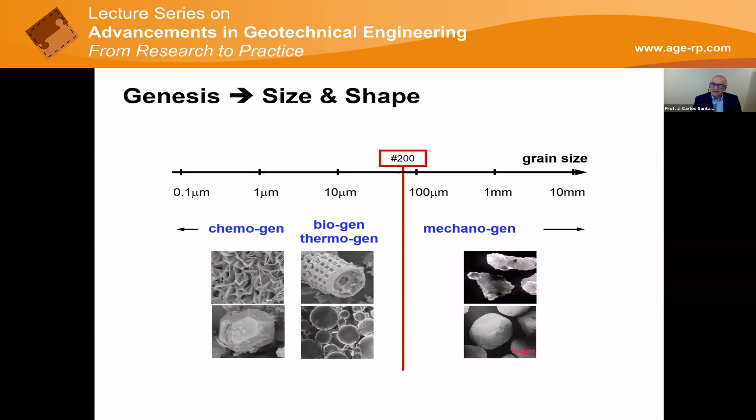So now we see that across the size range, we see different formation mechanisms, but also the forces acting on each individual particle change. At the large size, the self-weight of the particle is important. At the small size, electrostatic forces - that's the reason why dust gets on our furniture - and capillary forces play a more pronounced effect. Throughout the whole size range, effective stress governs. The only difference is whether these other forces come into play in addition to it or not.

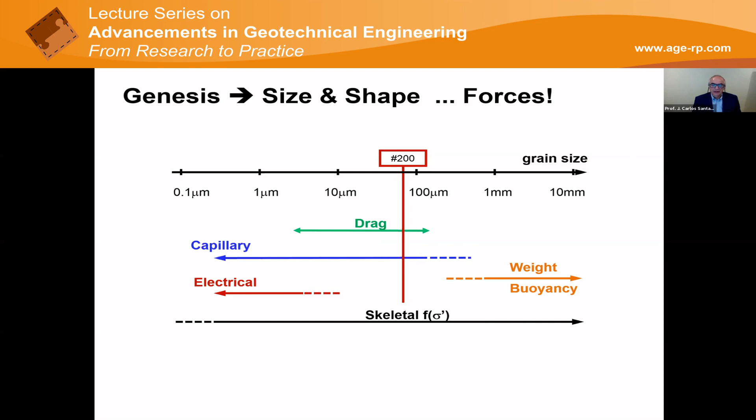And the last slide in this sequence, I want to remark what I said earlier. On the coarse size, the question is, are the particles rounded or angular, and do we have enough finer particles to fill in the voids, to increase the interconnectivity between particles and the stability of these skeletal units? On the finer side, it's the electrostatic interactions we were talking about - the van der Waals forces, the double layer repulsion, and the importance of the dipolar nature of the water molecule. Otherwise, none of these effects would happen.

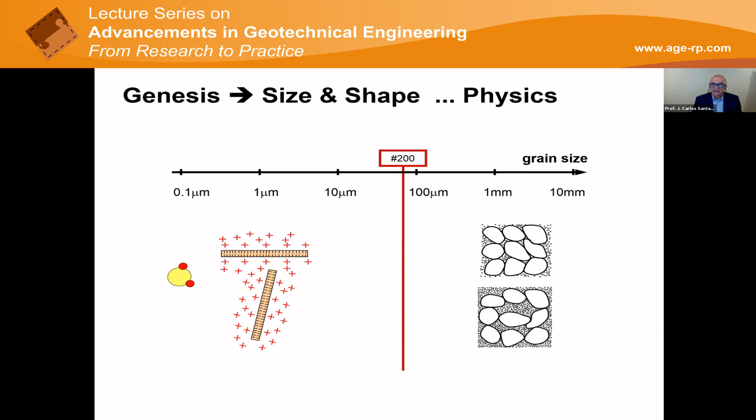In the old times, we used to mix bentonite with carbon tetrachloride, an experiment that comes from the 1920s, to demonstrate that we lose complete plasticity when we do not use a polar molecule. We don't use carbon tetrachloride anymore because it is a carcinogen, but look for kerosene, or look for a molecule that has low polarity, and convince yourselves of the importance of water in the behavior of clays.

So then that brings us to the revised soil classification system. We are very excited about this method because it's working very well. The basic unified soil classification system really got it so well in so many dimensions, but some of the choices made were not precise. And now we have 100 years of data, so we can do much better.

It's about occupancy of the pore space by the fines, and whether it is coarse controlled or gradually becomes fines controlled. On the left-hand side is all about the effect of pore fluids, and so we make liquid limits with water, water and salt, and kerosene, and we have a wonderful clustering opportunity to identify soil behavior.

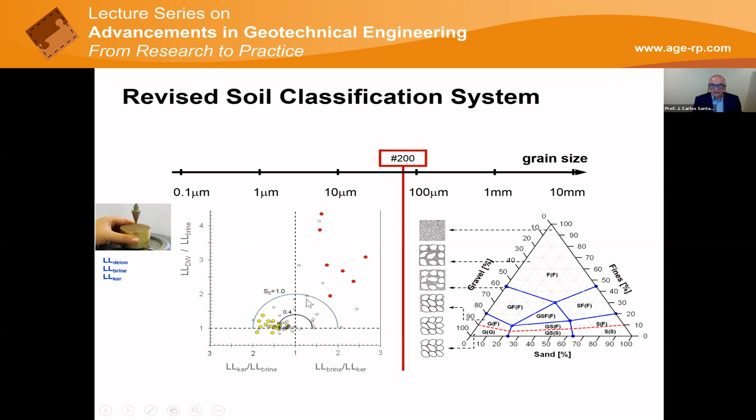So in summary folks, I think it is so important to remember what Terzaghi told us in the 1920s: soils are made of grains. Soils are granular materials, and everything else follows - the importance of size, of shape, of the pore fluids, of effective stress, compaction, stiffness, dilation, strength - it's all effective stress dependent. And then when we go into fines, it's all about how much surface they have, how small they are, specific surface, and the sensitivity to electrochemical and capillary forces.

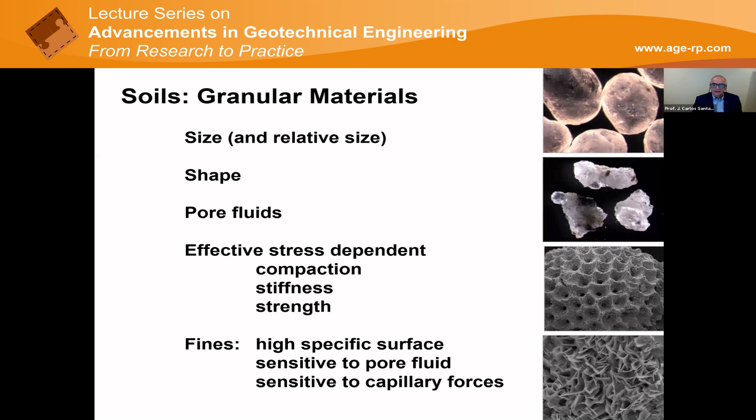So with that introduction in mind, now we know what we are testing. And the next question is, what can mechanical waves tell us? You can hear Pavarotti singing, and there is so much information that comes to our ears by sound waves. So what is the origin of sound waves, and what can they tell us about soils?

Well, everything is about Newton: F equals ma. This is mass density, rho. This is acceleration, the double derivative of particle displacement with respect to time twice. This is ma, and this is the force across an element. And so from here you see that there are two modes of propagation: one is varying longitudinally in X, and the other is varying transverse with particle motion in Y, but propagating in X.

I couldn't get the picture to be precise, but you see these are pendulums hanging from a wall. If you displace a particle transverse to the position of the pendulum, and the pendulums are interconnected by little springs, then this perturbation will propagate to the right while the particle continues vibrating in the Y direction. A longitudinal wave is when I have the same sequence of pendulums, but now I displace one in the same direction as the alignment, and they are connected with little springs, which is the contact stiffness between particles. This perturbation propagates to the right, but the particle motion is in the same direction as the perturbation - this is called a longitudinal wave.

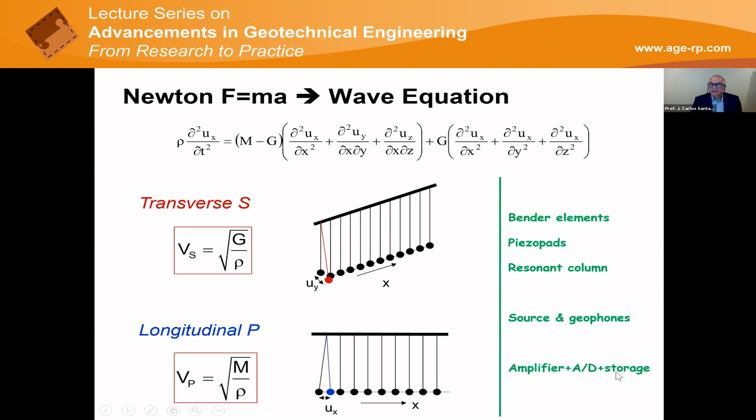You need some type of a source. A piezo crystal can do it, but in the field we use other bigger sources and geophones. In all cases you need an amplifier, an A to D converter, let's say an oscilloscope, and some storage capabilities. Very simple setup, very powerful measurement.

I will not mention anything about attenuation because we don't have much time, but I will talk about S waves and P waves. And because S waves propagate by shearing through the skeleton, not by compression—otherwise water plays a critical role—we're going to say quite a lot about S waves. So here we go.

Let's assume I have a column of slurry, and at the bottom of the slurry I put two bender elements, in the vertical direction, so they are not affected by the self-weight. We see how, as the column goes from being a slurry to being a sediment, the shear wave velocity becomes transmitted across the granular skeleton. At the beginning there is no transmission—it's a fluid—and gradually the skeleton begins forming and the shear wave becomes stronger and travels in a shorter time.

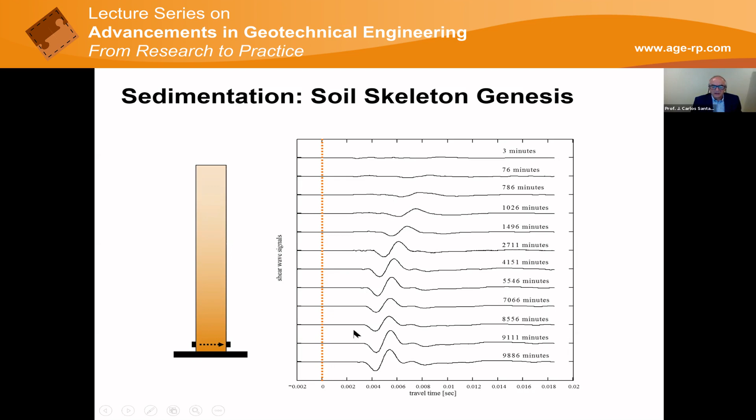Some of these travel times are very long, folks. These wave propagations are less than 1 meter per second—we ride a bicycle at that speed. So these are really very slow wave propagations at the beginning of the formation. And we see that in multiple experiments.

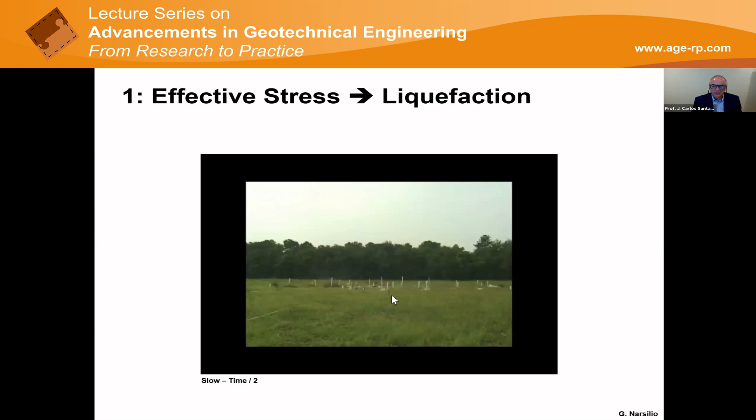Let's say this is blast densification. I'm not quite sure you can see the movie, but we blasted the soft layer at the bottom, and then the high pressure gets jetted out to enhance the ability of the soil to hold seismic action. By the way, this soil eventually settled like a foot. Major densification took place, but for many minutes, probably more than 60 minutes, the soil remained liquefied.

So let's see what shear wave can tell us. Let's take this liquefaction tank. We put two bender elements. Before we whack it, we have wave propagation, transmission. The signal is quite noisy because we are not allowed to stack—these are short-time processes. Now we whack it and we lose the signal. The soil liquefied. Then as the pore pressure dissipates, the soil begins reforming and the signal appears again.

In liquefaction, every time we liquefy a soil, we rebuild the soil from zero. That's the reason we can liquefy the same medium so many times, because it only densifies the very bottom of the column—the rest gets resedimented. This is powerful.

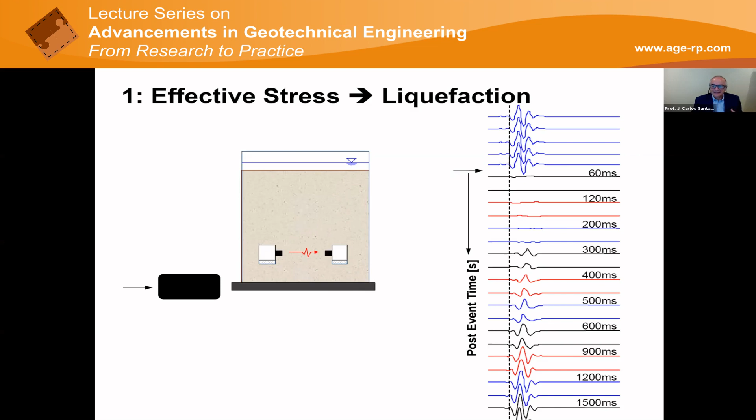Now we can do other things. For example, we can put geophones in our roads, and we can see what happens as a truck approaches the location we're measuring. We see how the granular base gets stiffer and stiffer because the wave propagation gets shorter, the travel time gets shorter and shorter, then the truck passes by, and the wave propagation decreases. It's all about the stiffness of these contacts.

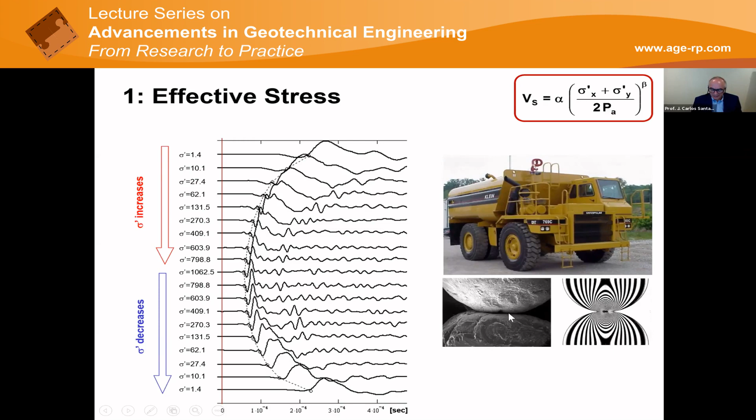This is data collected for more than 20 years from the literature and some of our own results. We have this Hertz-type power relationship that relates the state of stress—effective stress—to the shear wave velocity. We have a factor alpha and exponent beta, and depending on the soil—whether it is cemented, so beta goes to 0, low sensitivity to stress—or if you have Mexico City clays, we have completely different sensitivities to state of stress. These parameters are correlated and help us tremendously in understanding the properties in the subsurface.

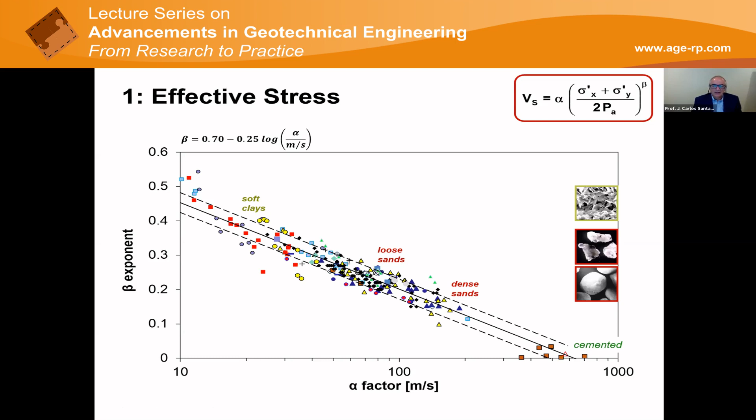But there are other forces that play between contacts. We already discussed the importance of suction. If you take a Bishop-type formulation, we can add it to the effective stress produced by the boundaries—add the Bishop suction—and we can more or less approach what shear wave velocity does during drying. This is not the soil water characteristic curve; this is the change in shear wave velocity as the soil becomes desaturated and capillary forces increase.

At the beginning we have large voids, but then as suction increases, it gets to the menisci, where clay has accumulated—this was a clay sand mixture. Clay has accumulated, builds up high suction, and the stiffness of our soil increases dramatically. Suction can play a very large role.

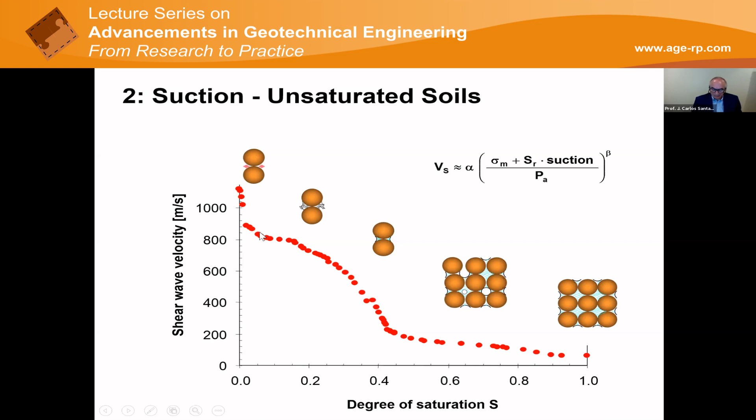But the most important part of measuring shear wave velocities is probably in the context of diagenesis and light cementation. Look, this is fly ash. We make a paste with fly ash, put two bender elements, and see with time how the shear wave velocity increases. We plot shear wave velocity versus time, and we started with 100 meters per second—this was just a paste. And you see the wave velocity passed the 400 mark.

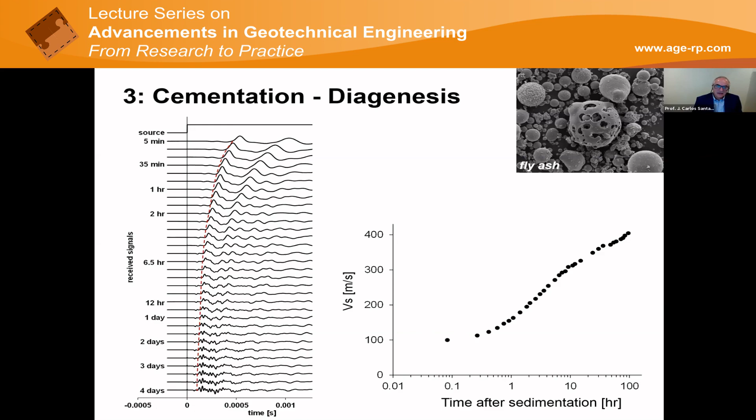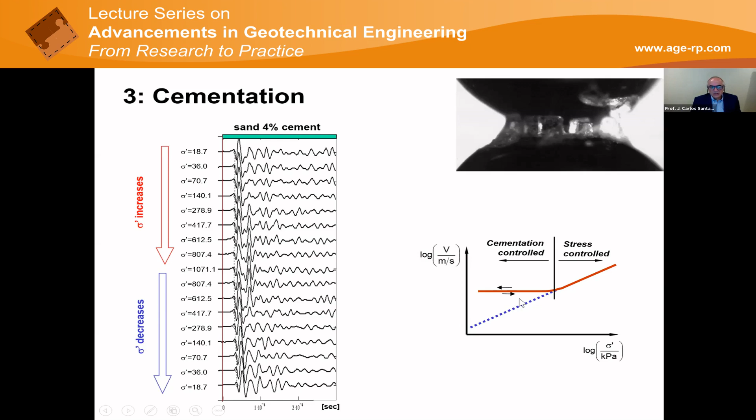Even non-pozzolanic fly ash developed mild cementation, which has a huge implication on the ability of self-compaction, and as you will see, it may tend to collapse upon loading. If the soil is cemented, cementation at the contact takes over the stiffness of the Hertzian deformation. So we become cementation control, and you may load the soil, but you don't change the stiffness much—you are in the cementation control regime. It is only when you load the soil very high that you go back to the stress control regime.

But as I hinted, during loading the soil may collapse. That happens in fly ash, and it may trigger some of the failures we have seen around the world, and the same in mine waste, in tailings. That early cementation hinders self-compaction, gives us high stiffness, but as loading continues, the structure may collapse. And we see the collapse in the shear wave velocity.

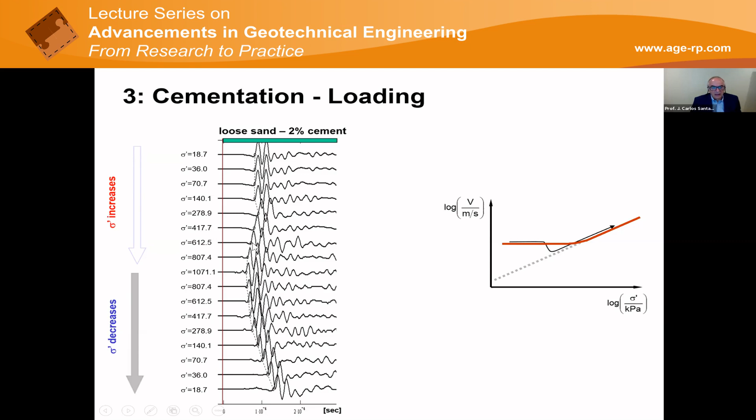The last important observation I would like to share is that if you take a sediment, a sand, and let it cement under confinement—let's say under 400 kPa, we put some cement and let it harden under confinement—the contact is squeezed by the effective stress. When you unload it, the contact gets stretched. Particles, like a soccer balloon, expand, and any cement that was in between gets broken. When you reload, you don't go back to the original stiffness. It's gone. This is the problem of sampling.

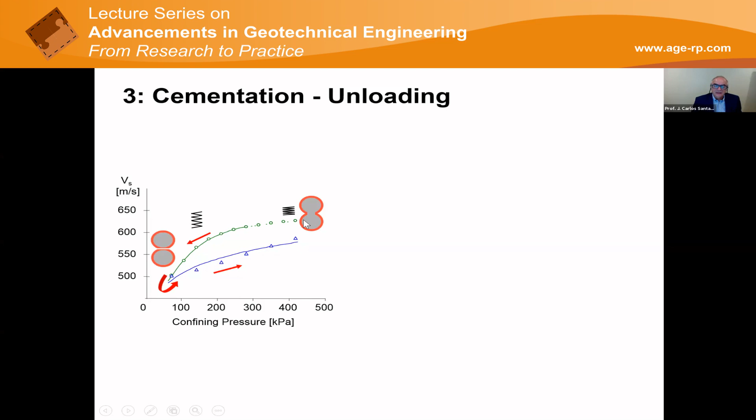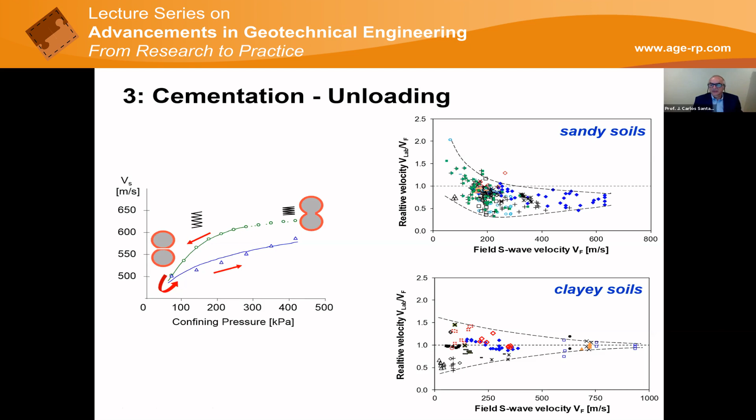In clays, the effect can be tricky, because in soft clays during sampling you may actually consolidate the clay and give higher stiffness. So sampling is a major problem, and on the contrary, is a major advantage for the use of shear waves to know what is the stiffness in situ.

But talking about using this to make settlement computations, I would like to caution you of the following. Let's follow this experiment from Viggiani and Atkinson, wonderful data from 25 years ago. During triaxial testing, they measured the shear wave velocity at different points, and this is how it evolved. Even near failure, the shear wave velocity didn't change much, or the shear modulus in this case.

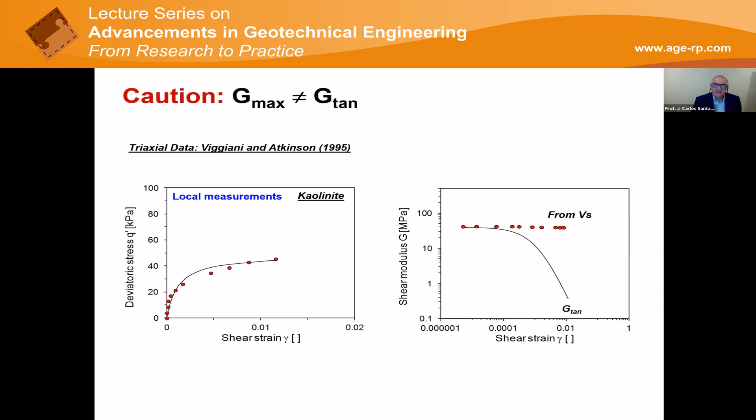Now, I curve fitted here with a hyperbolic model to get a smoother trend, and I plot the tangential stiffness along the path—the tangential stiffness clearly drops. This is our hyperbolic modulus degradation curve. So be careful, because load deformation is a process of continuous change in the soil structure. However, wave propagation is an instantaneous measurement of stiffness and does not involve change. Two completely different processes. If we use shear wave velocity for settlement computations, we have to do it in the context of proper modulus degradation.

I will say something about P waves, and this is the logic of P waves. It's a constrained modulus—this is from theory of elasticity—which is a function of the bulk modulus and the shear modulus. Now I can begin doing this cascade of analysis. The bulk modulus of the soil is the bulk modulus of the skeleton plus the grains and the fluids.

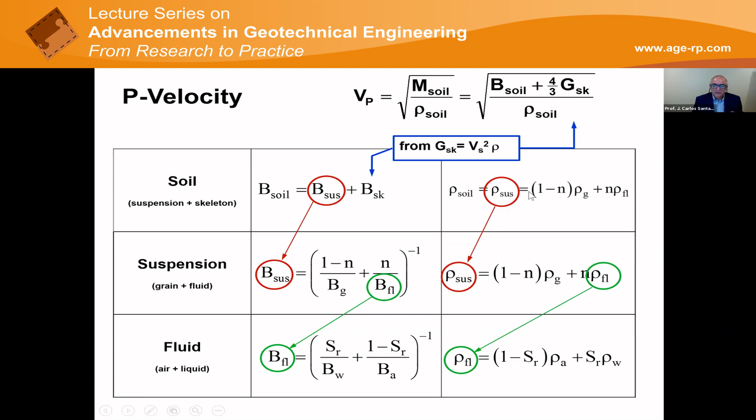These are the grains and the fluids, but the fluids may have water and air. So I do this cascade and fill in this equation, and I do the same with the mass density. This now is going to tell me something important about P waves: any presence of gas will have a huge effect on the P wave velocity.

In fact, this is a soil with bacteria, and now we will feed the bacteria with nutrients, and the bacteria will begin making bubbles, typically CO2, or in this case nitrogen, which is not very good.

It becomes quite contaminant, but these bubbles now soften the stiffness of the water, and you detect that with P wave velocity very well. Then a bubble escapes, and new bubbles begin getting formed.

But this is the main contribution of P waves for our purposes: is the soil truly saturated? You can go back to Ishihara and see the cyclic resistance ratio. As soon as you have any gas present in the pore fluid, your ability to resist cyclic shear increases quite significantly because of the compressibility, the compliance of gas bubbles.

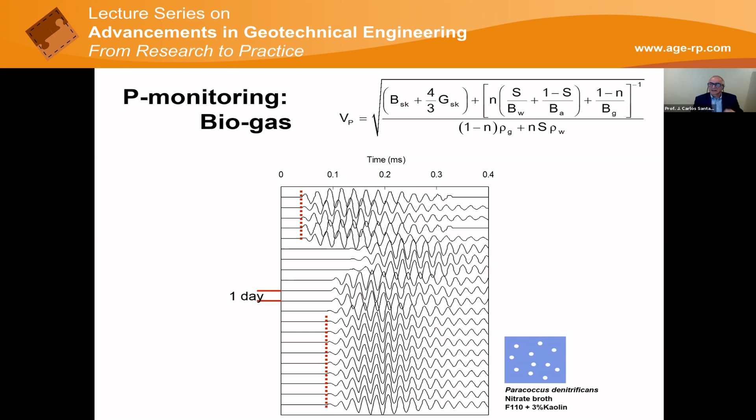But P waves are amazing if you are offshore, and marine seismic is exceptional. Sub-bottom profilers are exceptional. Here we were checking the foundations of a long bridge after the Katrina scouring effects, and you see the scour next to every pier, every foundation.

This is the famous Storegga landslide. Look at the magnitude of this landslide. It's 12,000 times bigger than the Vajont landslide. This is huge, and you can visualize it so beautifully with bathymetric measurements. There is so much we can do today with bathymetric measurements.

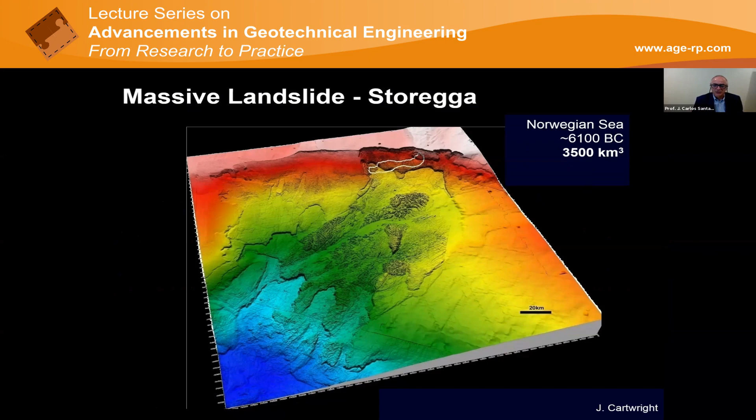So for those of us doing geotechnical engineering with applications offshore, measurements with P waves are certainly very powerful. So folks, this is a brief summary of what we can do with P and S waves in our field.

These, first of all, are small strain phenomena, great for monitoring processes. The shear wave is all about the stiffness, the shear stiffness of the skeleton. There are excellent ways of measuring that in the laboratory and in the field.

The P wave is a lot about how close we are to full saturation. Together they complement each other, and they give us complementary information that we can use to enhance our understanding of the sediments.

I'm going to speed up here because we're going to run out of time.

The next section is about electromagnetic waves, and then we see the beauty of nature because it's all about electromagnetic waves. Everything comes from Maxwell's equations, and this is the wave equation. It has one more component than the standard elastic wave equation, and that is our problem because that can make it very attenuating, and it will not go deep enough into our soils.

But the most important thing I would like to highlight here is that there are three parameters: the magnetic permeability, the electrical conductivity, and the permittivity. I would like to tell you what each of them is telling us about the soil.

But before I go any further, let me just say that, once again, they're relatively simple to measure. In some frequencies, the only thing you need is an oscilloscope and a signal generator. You can replace that more efficiently with an LCR meter. With higher frequencies, you will need a network analyzer or a vector analyzer.

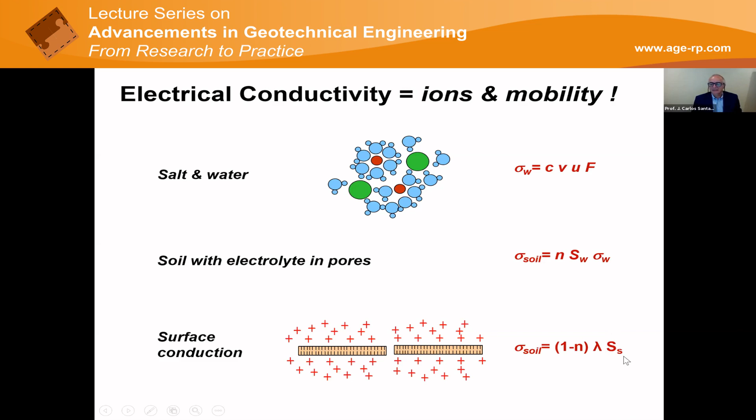But the evidence is very strong. This is a sand, a typical sand for different porosities, and that is Archie's law. Archie's law is not really a law, it's just this equation with a few fitting parameters. It's all about porosity and electrical conductivity of the pore fluid, with a couple of fitting parameters to give a little bit of curvature. But in the case of soils with high specific surface, this component kicks in.

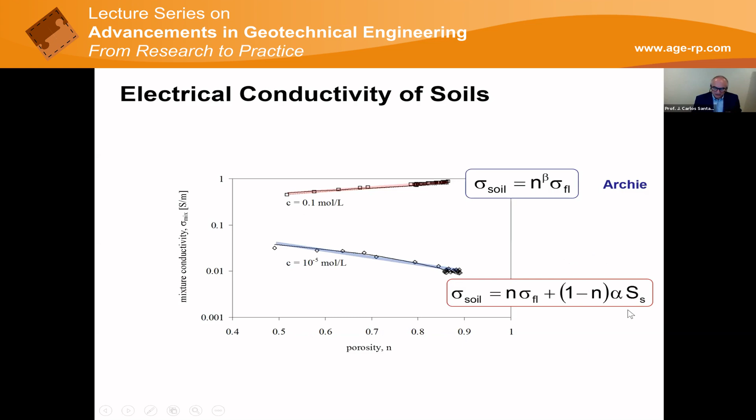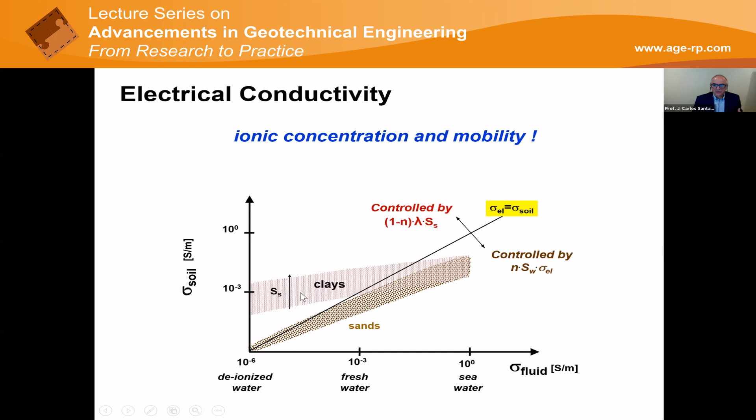So be careful—Archie's law should not be used blindly, particularly when you have clays and pore fluids with low ionic concentration, let's say in rivers and lakes. We have to be more thoughtful than just applying Archie's law.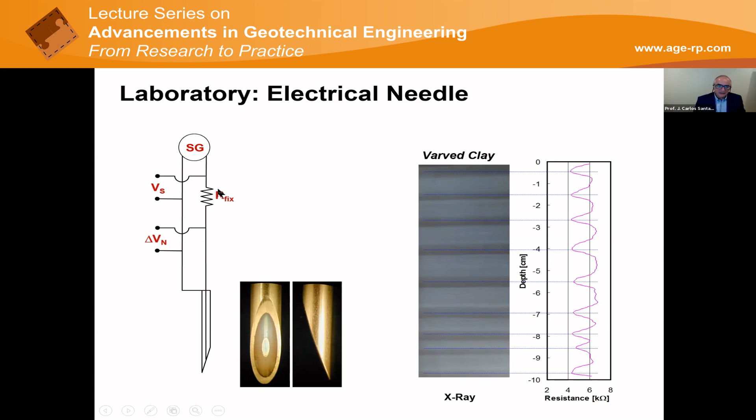Very simply, a signal generator and a two-channel oscilloscope. We can go further and put many electrodes and then do tomographic techniques to get a tomographic image. We can do this in the laboratory, and we can do this in the field. That's one of the beauties of geophysical techniques—the same process can be readily upscaled to the field.

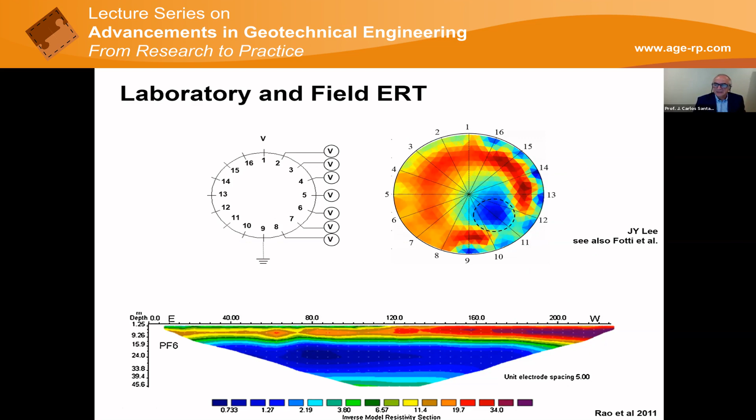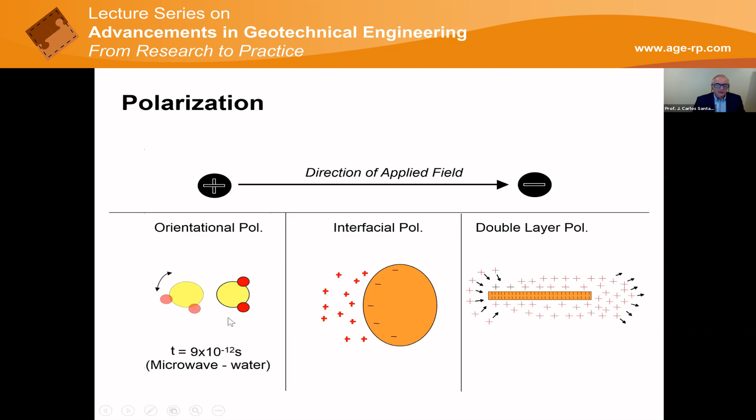Finally, I would like to speak about permittivity. For permittivity, we have to keep in mind that it's all about how the water molecule rotates—it's the same mechanism used to heat a potato in the microwave. We rotate the water molecules. This is what we're doing with lower field intensities, but it's mostly about this. There are a few other effects, but for the most part we should be paying attention to the rotation of the water molecules when we send an electric field.

So permittivity will be proportional to how much water we have. Here we are squeezing a clay, running a consolidation test while monitoring the permittivity, and you see the effective stress increases, the volumetric water content decreases, and the permittivity decreases.

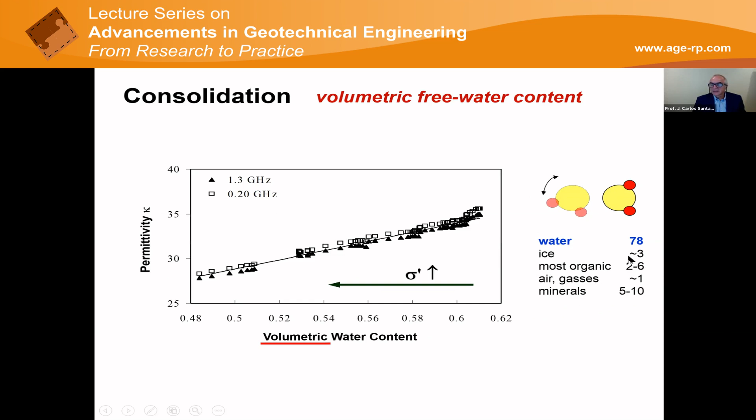If the water freezes, very easy to detect with permittivity. If the water gets contaminated with air, gases, any DNAPL, LNAPL, very easy to detect. So these are the things that we can do with permittivity measurements.

And really, if you haven't used GPR, there is a chance that GPR may work in your sediments. It needs enough skin depth, then it is amazing what you can detect with GPR. But you need the skin depth, and as we said earlier, it depends on electrical conductivity. High electrical conductivity, where there is water and salt or clays, will not give you that penetration depth.

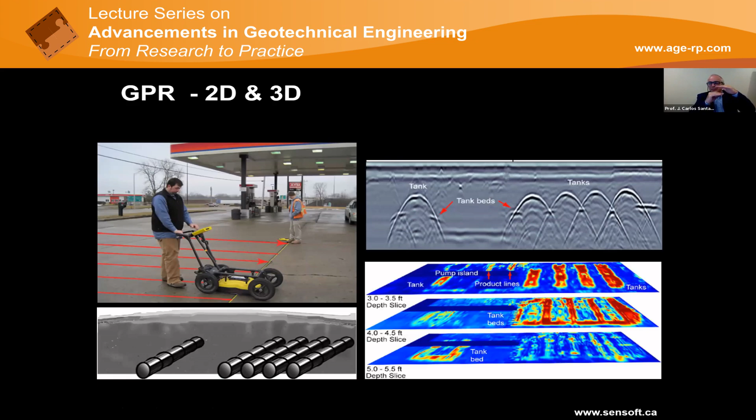So what can we do with electromagnetic waves? Keep in mind that it's all about penetration depth primarily, electrical conductivity, very powerful and robust, very easy to implement. And so we are going to be measuring electrical conductivity, ionic concentration, availability of water molecules freely to polarize, whether it freezes or not, etc.

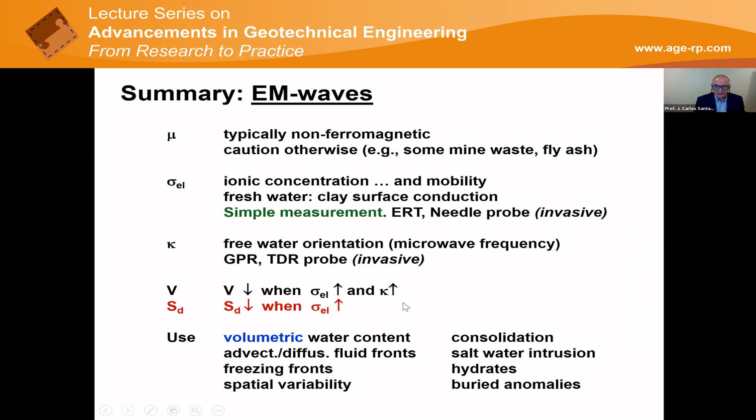Thermal measurements. There are a large number of thermal parameters. I'm going to focus only on one today because of its critical importance, and the other ones can be estimated much better. It is really about thermal conductivity.

Now, what is temperature? Temperature is random vibration of molecules. If you're in a gas or in a liquid, they collide, and that's the way they transfer the thermal heat, thermal energy. In a solid, these random vibrations are not completely uncorrelated because the atoms are linked by little springs. So if this one goes up, this one tends to go up or down, more or less in synchronicity, and this creates a wave. They are called phonons. So in solids, phonons transmit thermal energy.

So what controls heat conduction in soils? Well, this is an experiment using 1 inch diameter, 2.5 centimeter glass balls. We put a heat source at the bottom, apply a load, and have a thermocouple in each of them, but we also have an infrared camera. And you can see how the heat front of these vibrating phonons propagates from one to the other through the contacts.

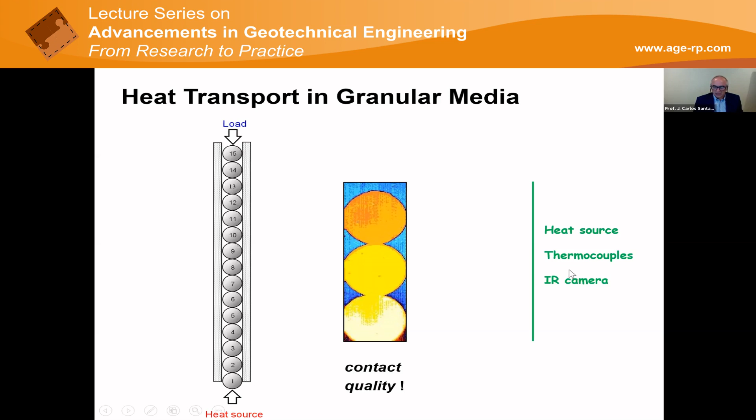So how do we do these measurements? You need a heat source and thermocouples, very inexpensive. For surface phenomena, an infrared camera, but only for surface phenomena - beautiful studies done within laboratory chambers by the community using infrared cameras. But the bottom one is a source of heat and thermocouples, and the rest, the mathematics, is very simple and very robust.

And so now we begin studying what controls the ability of the phonons to propagate from one particle to the other. Well, the higher the state of stress, the more you squeeze the contact, the better heat gets transmitted. And you know that because if you're going to grab a hot pot, you're not going to squeeze your fingers into it - you'll try to grab it as lightly as you can.

And so effective stress is very important for heat conduction, as shown in this curve. Now, the other important thing is that if you're going to grab the hot pot, you don't do it with a wet cloth, because a wet cloth is very conductive, and furthermore it's going to burn your fingers. And so that is the importance of recognizing the presence of water. Water itself is not very conductive, but water at the contact between particles help the phonons jump the void and get from one particle to the other.

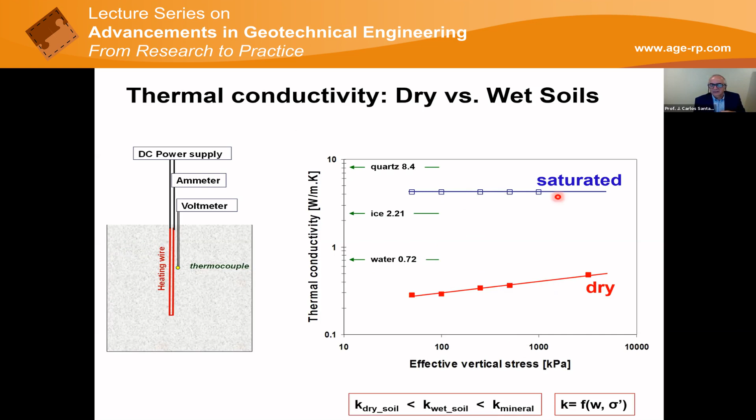Summary. What is important for thermal conductivity? What is the mineral? The presence of water, you saw, plays a critical role. Let me go back and highlight that this was in logarithmic scale, and there was an order of magnitude jump. And by then, the presence of water says, who cares if you change the size of the contact or not by effective stress - it is the presence of water that will govern. So the presence of water is very important. You don't need much - a little bit is enough to increase thermal conductivity a lot, because the water goes, by capillarity, into the contacts where it is needed the most.

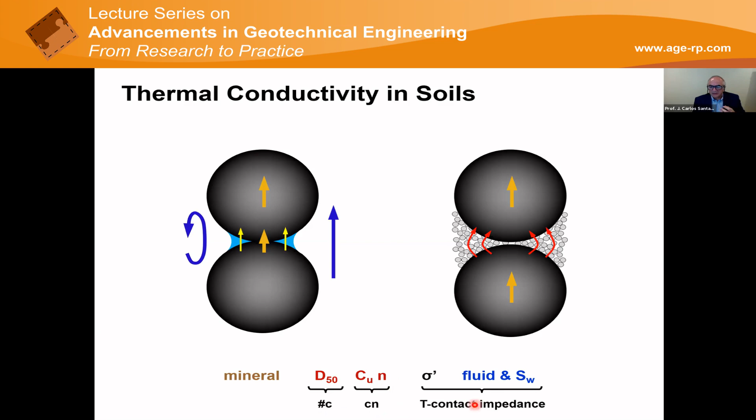And of course, stress acts to flatten the contacts. But in addition, if you have fine grains filling in the void, these fine grains also create alternative flow paths, particularly if these grains are already beginning to carry the load, if you have 40% of them. Together all these control the number of contacts, the coordination numbers per particle, and the quality of the contact.

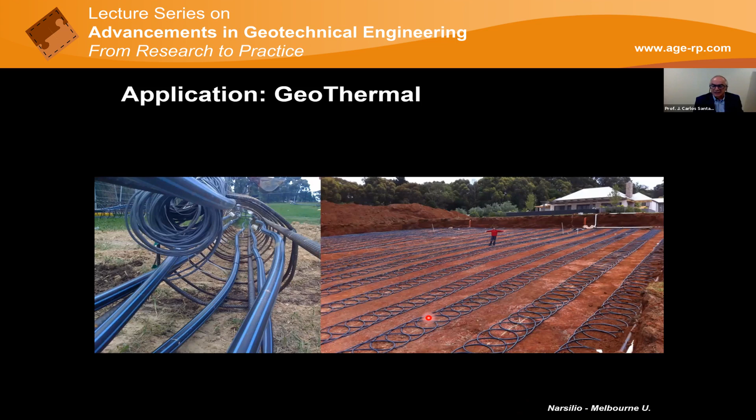This is coming from Melbourne University: thermal piles, and then putting heat exchangers in our foundations is becoming now a very important part of our geotechnical field. These are standard measurements and it should be done, it can be done in any laboratory and cell device.

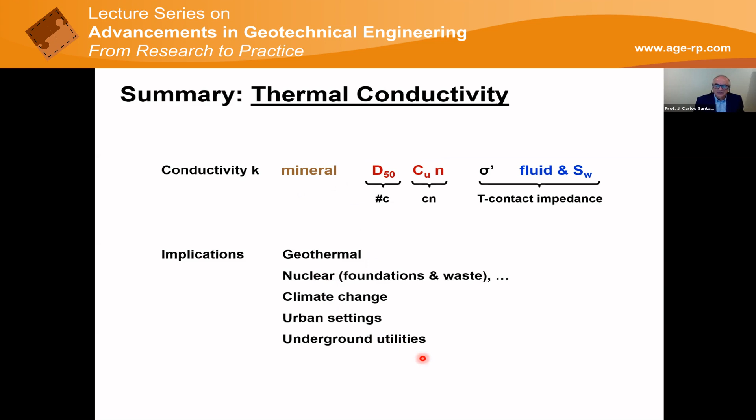Closing thoughts about thermal conductivity were captured in that equation. Just to add that all geothermal processes, whether nuclear energy from foundations to waste, climate change, urban settings, underground utilities, is going to be very important.

I said at the beginning that these are two tools that are becoming increasingly more used in our field, primarily for the laboratory, even though petroleum engineering has used NMR in the field quite extensively. But I want to bring them to your attention. This is not just for sophisticated medical diagnosis, we can do this in our laboratories with great success.

So let me start with NMR, nuclear magnetic resonance. That tells you exactly what it is. The nucleus, particularly the nucleus of hydrogen, well, they all have their spin, but this one is unbalanced. And so all these little magnets are there spinning and moving. If you put an external field, you force them to align, and then you take them out of alignment and they come back gradually to that alignment. This is what nuclear magnetic resonance is.

Now, every time by diffusion these atoms or water molecules reach, for example, the walls of minerals, they get demagnetized. They lose that orientation, they relax. And so we can measure how long it takes for that demagnetization to take place, and that tells us something very important about pore size.

So let me give you an example. This is kaolinite paste during drying. During drying we are losing water, and this is what the total magnetization that we are measuring is telling us. But where are we losing water? Now we analyze the spectrum of these vibrations, and we see at the beginning we lose the water in the large pores, but as drying continues, water remains only in the small pores. So this relaxation time is actually telling us pore size.

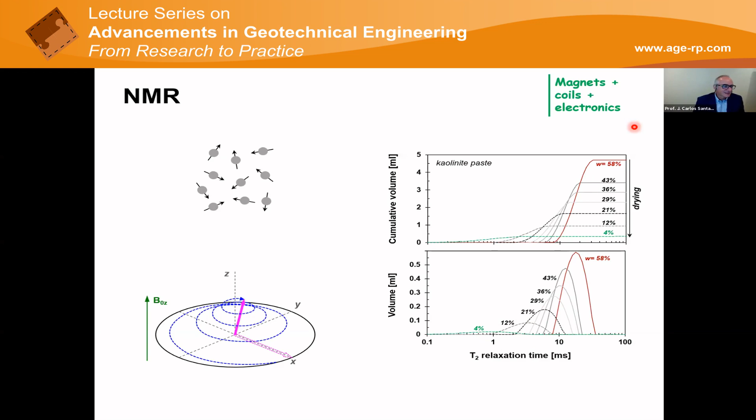The other tool is X-rays. Of course, X-rays have been around since Madame Curie and earlier, so more than 100 years, and embraced in our field early on, I have to say, in the 60s. But probably because of safety and cost, we have not used them extensively. Nowadays this has become much more accessible.

We have built our own micro-CTs, we have built two of them, and we have also purchased one, a very expensive one. But you can do quite elegant tests with micro-CT. The upper two we did in Grenoble, and these ones are now with our new micro-CTs.

Look at this: this is a container with kaolinite paste after freezing. You see these are all the ice lenses forming like onion peels. And the center, because of cryogenic suction, became so dense that ice cannot lens anymore there—just very few lenses. Everywhere else, ice formed lenses, like when an ice cream develops all the lenses. It's just amazing to see how cryogenic suction evolves.

This is the insertion of a blade, it looks like the tip of a dilatometer. And even though we analyze this as an equivalent continuum, the sand—look, it's all about successive shear localizations. We can see how germination takes place.

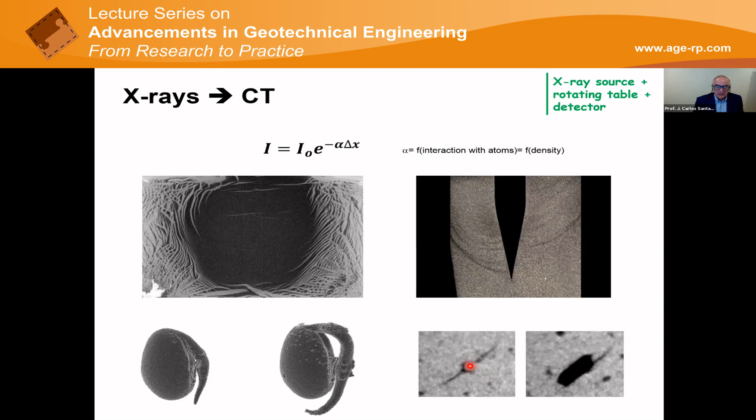Yes, we can see how gas comes out of solution and eventually begins forming cracks within the sediment. Desiccation cracks happen not only from the top down, but they may also initiate and nucleate within the sediment.

Exceptional opportunities, but all this requires processing, folks, and an understanding of these simple physical concepts and the ability to process. The last concept I gave you was about tomography, and tomography may sound like a scary word, so let me show you how simple tomography is.

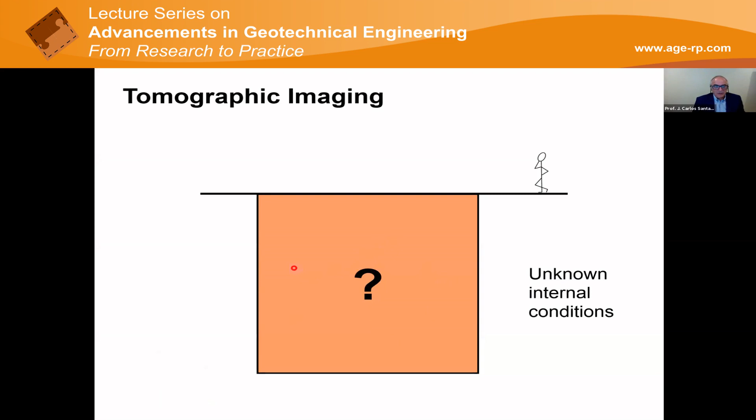Imagine that you don't know what is inside the body. Now we're going to have two long tubes, and I put a long tube here. This could be one borehole where we send elastic waves, for example with a CPT or another better source, and we detect in another borehole, and we see that there is a shadow. In other words, waves were propagating very well, but then they don't propagate so well, and then again. So there must be something somewhere here preventing propagation.

X-rays, P waves, S waves. Now, if we put a source at the top and do the same, and we measure the shadow, there has to be something along this vertical line. So now if we superimpose the two shadows - this was the shadow caused, we back project the shadows, this was the shadow observed on the vertical borehole - we're back projecting the shadows observed on the vertical measurements. Then the body must be here, and indeed, that is the body.

We do this with projection from many different orientations, and this is tomographic imaging. Then I can actually say, okay, how long it takes to travel from one point to the other through one pixel and through the other pixel. Well, it depends on the length that this ray travels through this pixel and the velocity.

So I create a system of equations and unknowns. These are the measurements, I know the travel length, and what I do not know are the velocities in each pixel. So I just invert this matrix and solve the problem. It's the problem of tomographic inversion. By the way, they got Nobel Prizes for this. Powerful, huh? Amazing. It has changed medical diagnosis, and it's changing our ability to do problems.

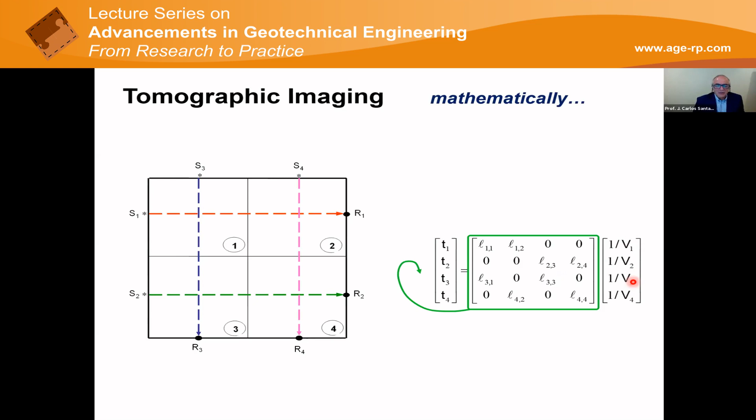Just to conclude, let me say that the opportunities when you mix geophysical measurements and a little bit of the mathematics of inversion are incredible.

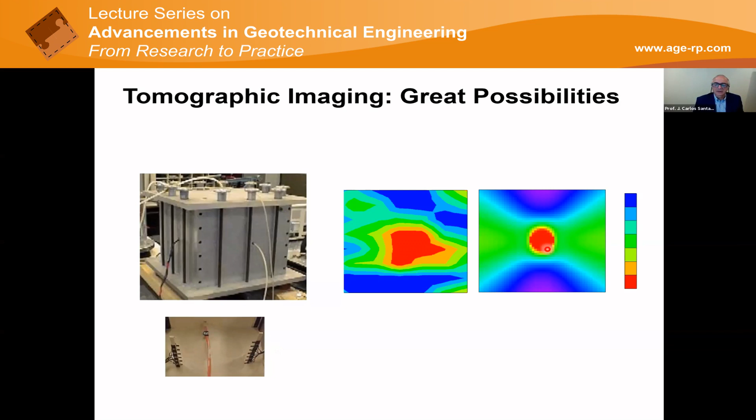You have all been very patient, so let me come to an end.

In order to understand geophysical measurements, we are invited to really understand what soils are all about, and that is a good exercise for everything we do in soils. We saw the importance of this changing physics, from the physics of fine-grained sediments to the physics of coarse-grained sediments. Take a look at the revised soil classification - it really predicts this behavior very well.

Then we saw that mechanical and electromagnetic waves interact with soils differently, therefore they give us different information. This is the same as our eyes and our ears - they give us different information, same as our thermal sensors. Together, they give us complementary information. We haven't lost any of the senses through the Darwinian selection process, meaning all the senses are very important to us, and they are not superimposing, they are complementing each other. The same with soils - each of them tells us a different piece of information.

Not clearly related to our human senses, but truly geophysical: X-rays, NMR, and positron emission tomography. All these other techniques have a role to play, probably more in the laboratory than in the field. Give them a try. You can build most of these devices yourselves with a little understanding and ingenuity. And all this ultimately requires processing.